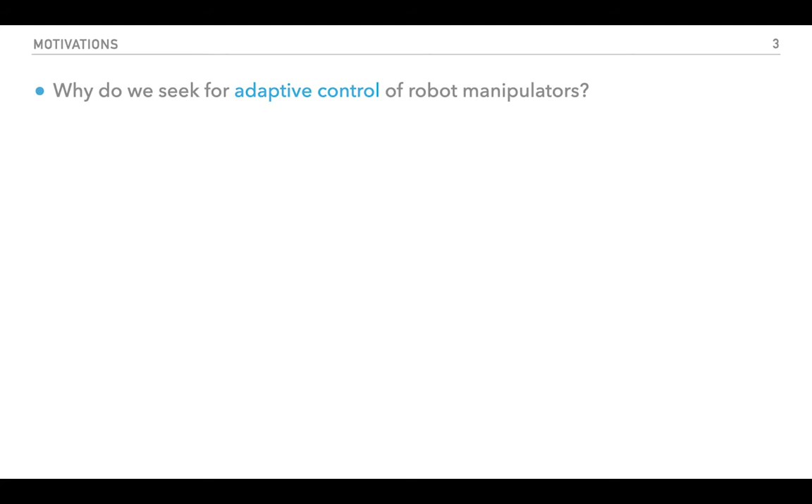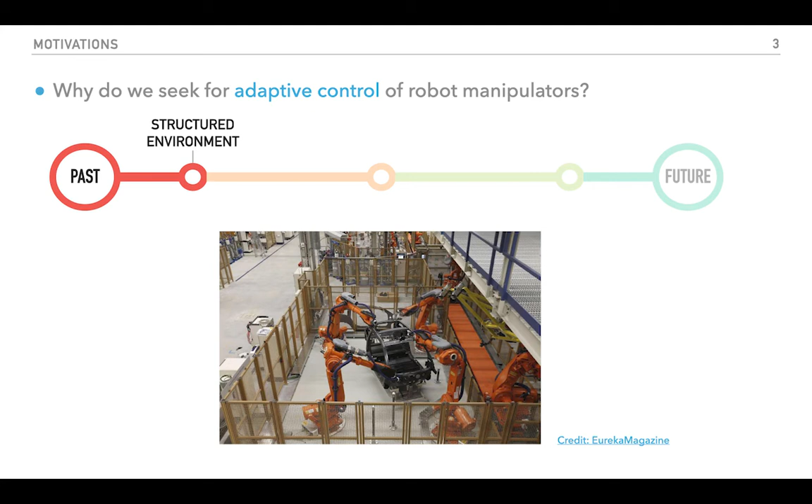First of all, why do we seek adaptive controllers for robot manipulators in the first place? The first industrial manipulators were used in pretty structured and safe environments, surrounded by big fences. The robots had to perform always the same task with very little variations and were provided with an accurate model for control. In recent approaches, robot manipulators are being applied in more dynamic environments.

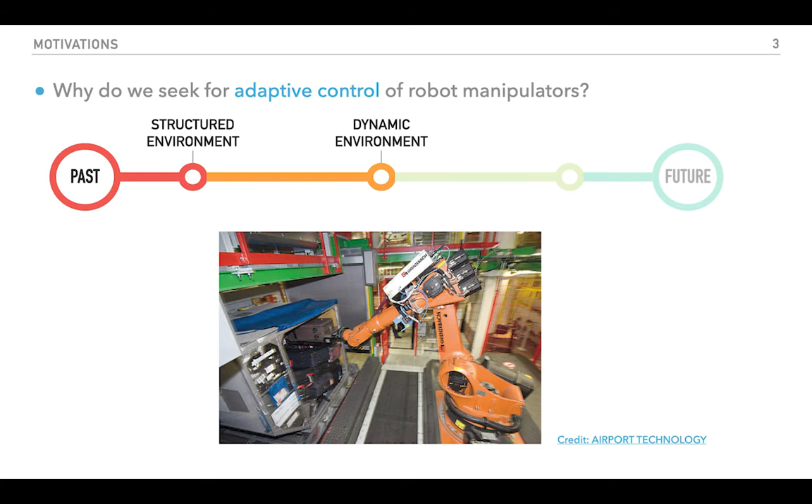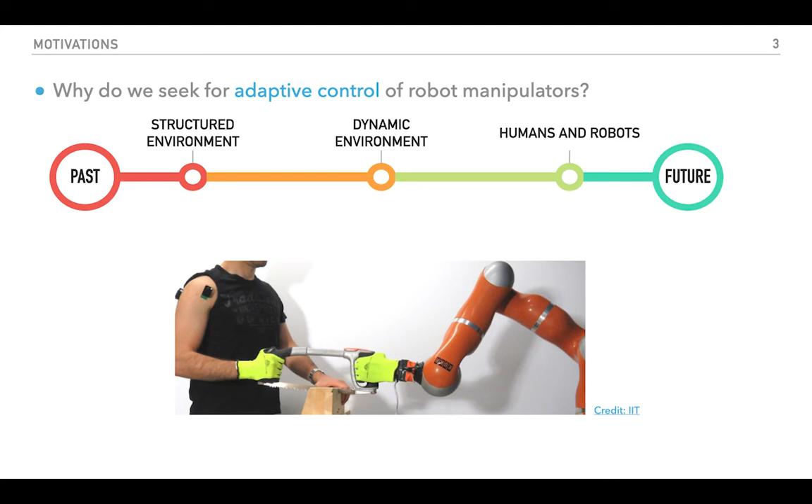Here, the work cell has to be flexible enough to handle different packages which can have different shapes, weights, etc. More cutting-edge and future applications are trying to increment the cooperation between humans and robots, which are now sharing the same workspace. And as you can imagine, in situations like these, we cannot provide anymore an accurate model for control. Thus, we need controllers that can adapt to large uncertainties.

Thinking about the manipulation task from the perspective of a human, you can realize that we rarely have an accurate model of what we're handling, yet we can achieve amazing motions.

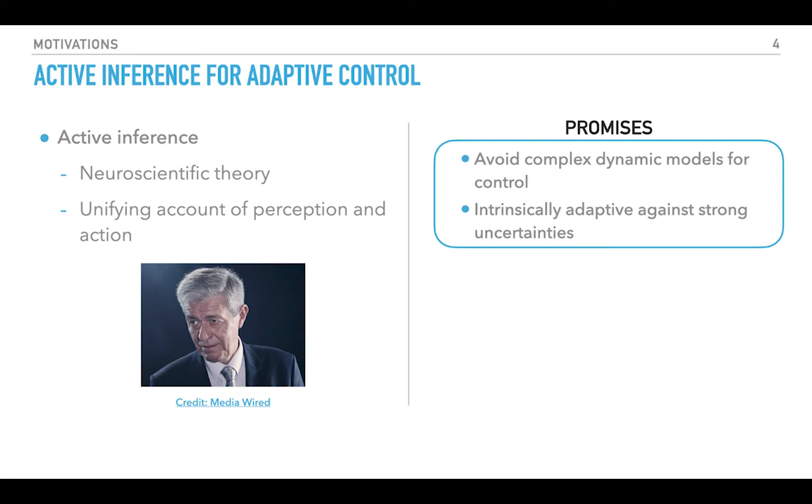In our work, we took inspiration from a neuroscientific theory proposed by Carl Friston called active inference. This theory tries to explain how our brain might function in terms of both perception and actions, capturing the adaptability skills of humans. The promises are that we can derive a control scheme which avoids the use of accurate models and which is also adaptive against large uncertainties.

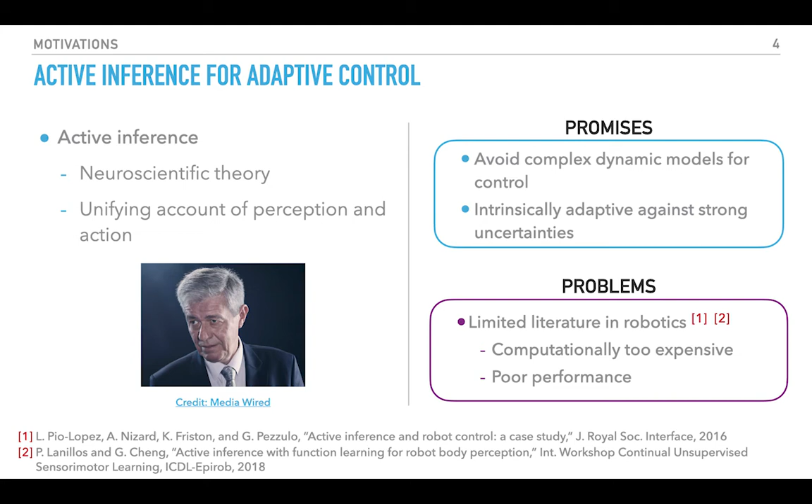However, when we started this study, the published work on active inference for robotics was really limited. The main problems of past solutions were that active inference was too computationally expensive and had poor performance. But we will see how with our work we overcame these limitations.

Since active inference is a fairly new concept in the field of robotics, I'm going to describe its working principle to have a common ground and understanding.

Let us assume that we have a real process that we want to control, let's say a robot arm. This robot arm can be represented by a number of states, x.

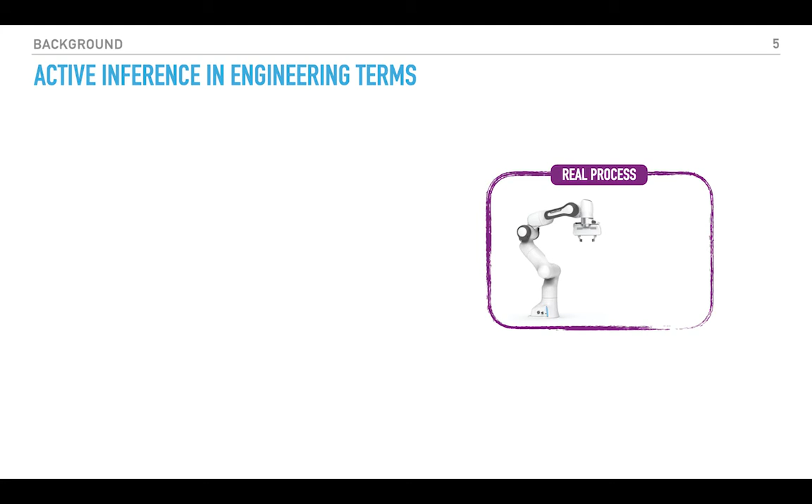To control the robot, we have of course our active inference controller, which can sense some noisy quantities from the real process through the sensor input. The controller also represents the real process with a pretty rough model. In particular, it has an internal representation, so an internal belief mu, about the real states x.

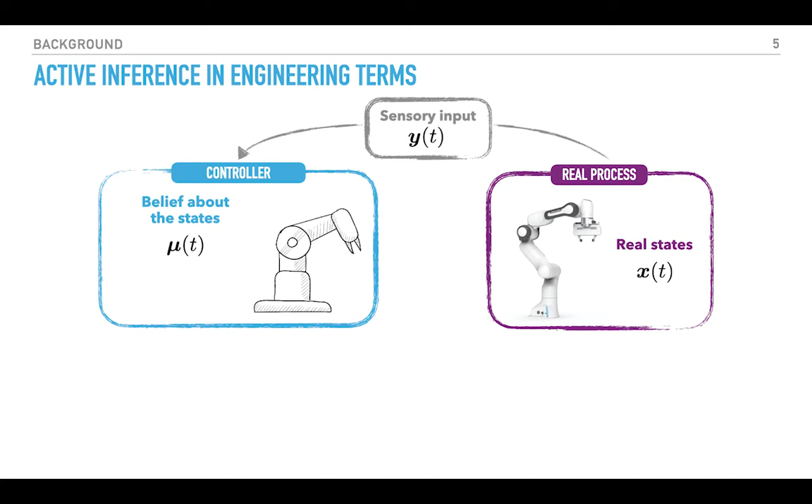The controller also encodes two generative models. In particular, the first one, g, explains the relation between y and mu, and the second one, f, represents the belief about the evolution of the states.

Furthermore, the controller can apply some control actions to the robot arm, torques for example. Doing so, it can change the sensor input in order to match a desired sensation. As a recap, the controller uses the sensor input together with G and F to refine its internal beliefs, and the controller uses actions to match a specific desired sensor input.

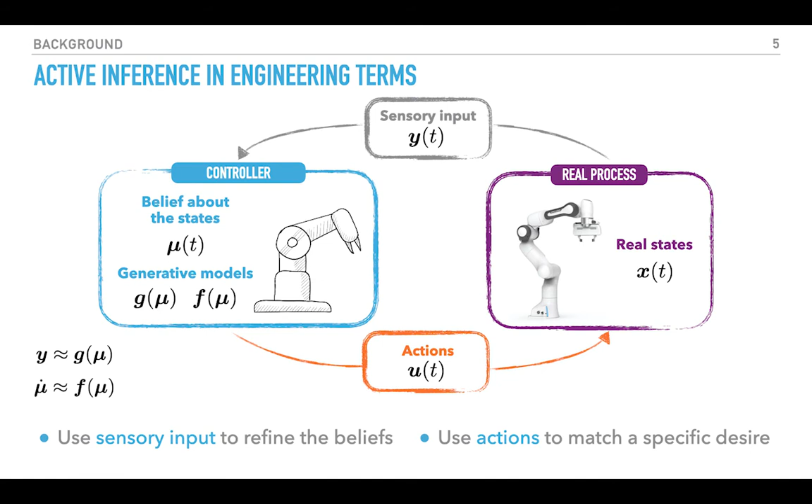Going a bit more in detail, how do we update the beliefs and how do we compute the control actions? Well, the belief update and the control actions are computed through the minimization of one single function, the so-called free energy, using a gradient descent.

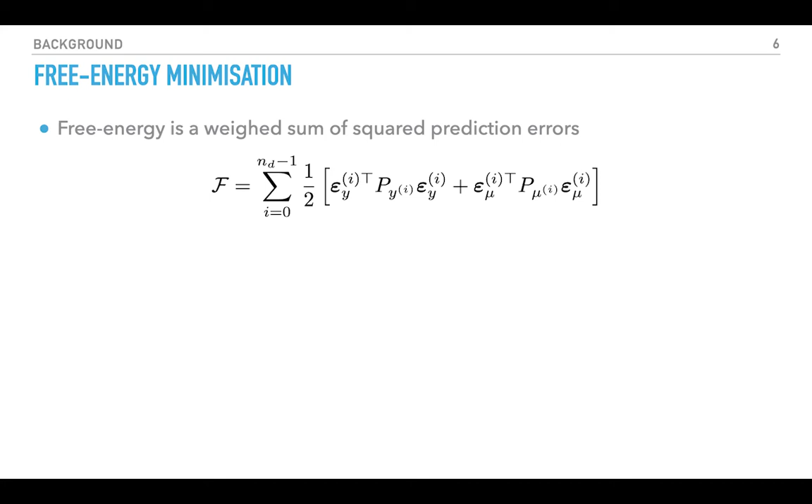The controller can suppress the free energy by changing the two things it depends on. It can change its internal beliefs about the external states, so performing filtering and state estimation, or it can change sensor input by acting on the environment, using the control actions.

So to be able to compute the beliefs and actions updates, we have to specify the relation between the states and sensor input, so G, but also the expected evolution of the states, F, and the effects of the control actions on the sensor input.

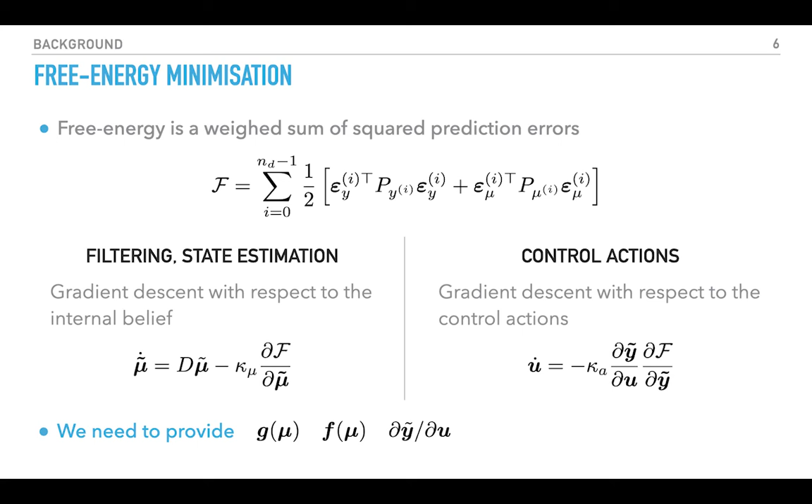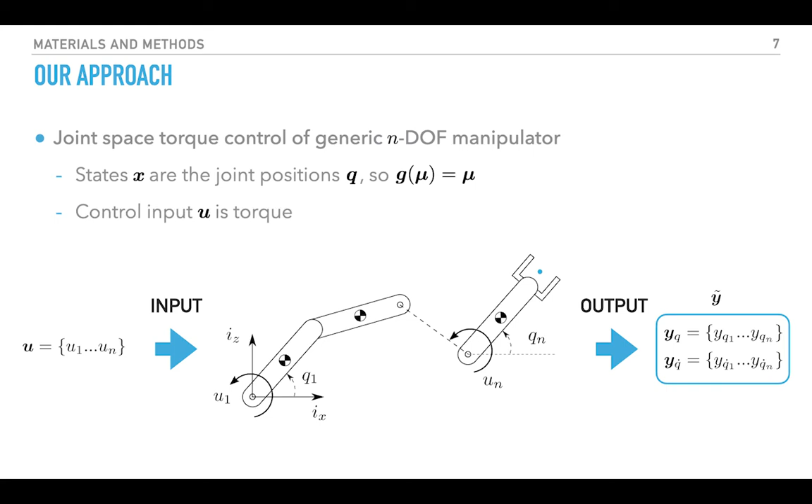In our work, we formulate the first active inference controller for online closed-loop joint space control of industrial robots using torque commands. We impose the states to be controlled as the joint positions, so G of mu is simply mu. Also, we use low-level torque commands for each joint.

To define our active inference controller, we had to make several design choices to define the expected evolution of the states, F, and the effects of actions into the sensor input. But the key point here was really to keep it simple. So instead of modeling the true dynamics through F, we impose that the states should evolve as a first-order linear system which converges to a desired value mu d.

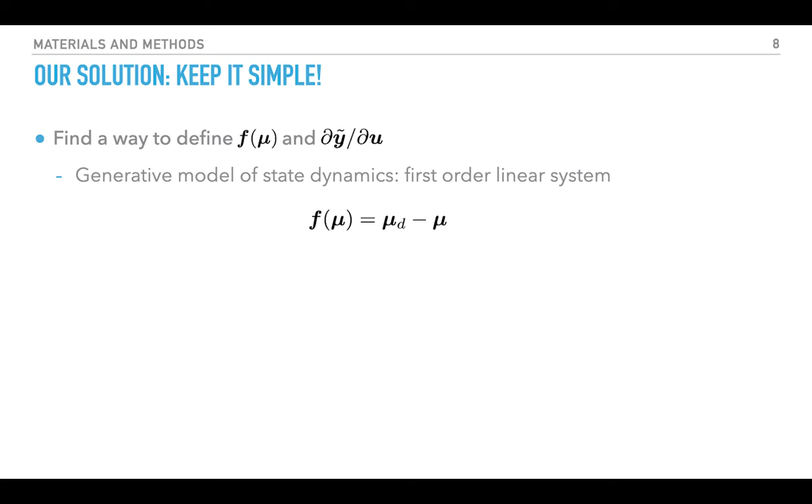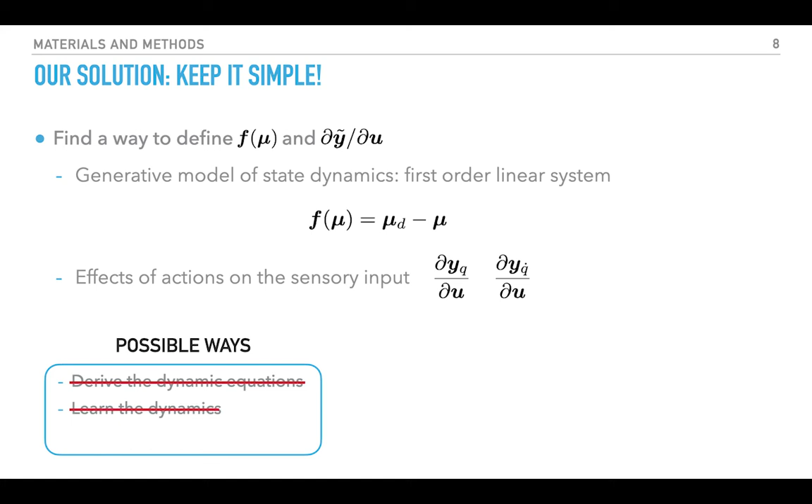To compute the control actions, we have to specify the two partial derivatives which represent the effect of a torque on measured position and velocity. Possible ways of doing so are deriving the dynamic equations, but this would defeat the purpose of our study, or we could learn the dynamics, but as we saw in past work, this requires a lot of data and can produce unreliable results. Finally, we could approximate the dynamics, relying on the high adaptability of active inference. This was the way we chose to pursue.

The approximation we introduced was to only encode the sign of the full time-varying relation. This means basically that a positive torque leads to a positive acceleration. Using active inference, we then derived a model-free control law where instead of modeling the true and nonlinear dynamical process, we define a reference model that active inference has to follow.

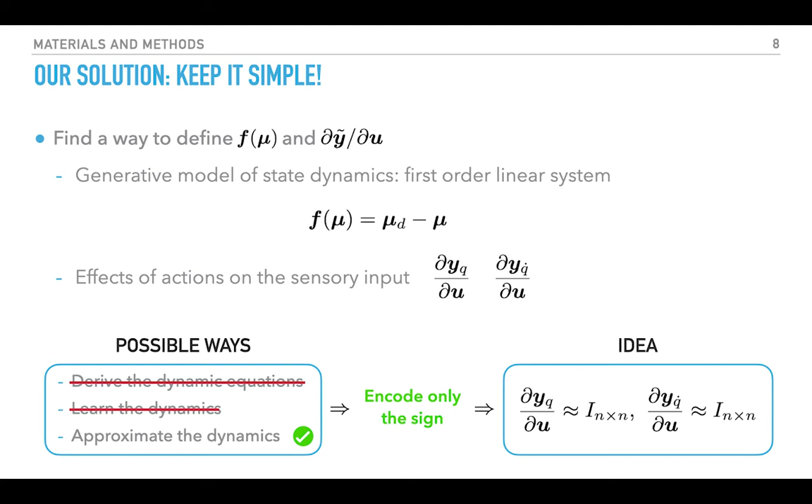To evaluate the performance of our active inference scheme, we chose a model reference adaptive controller as benchmark, due to its similar characteristics. In particular, also the MRAC does not require a dynamical model of the plant to be controlled.

For the tests, we use a Franka Emika Panda 7 degrees of freedom robot arm. Basically, the active inference and MRAC are tuned in simulation using a heavily approximated model, with fairly wrong link masses and inertias. Then, the controllers are directly applied to the real robot to appreciate their adaptive properties.

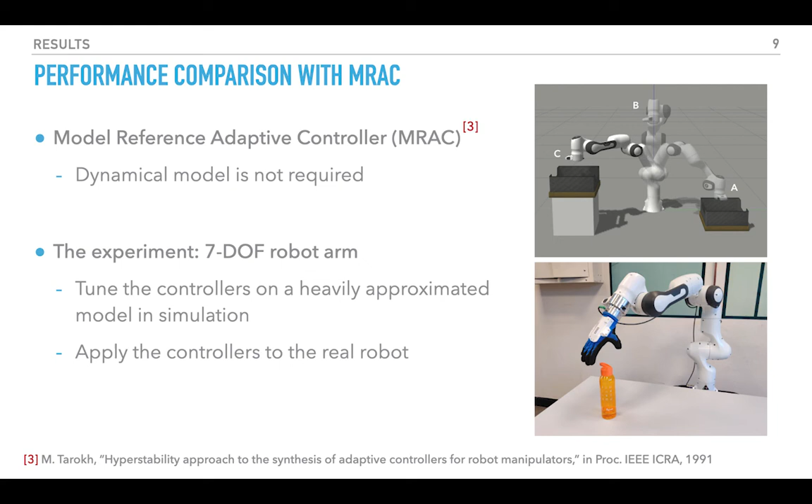First of all, we would like to point out that the active inference controller could be transferred from simulation to real robot without retuning, while MRAC causes a safety stop. We can see, however, some oscillations for the second last joint of the robot, but these are, at the end, damping down.

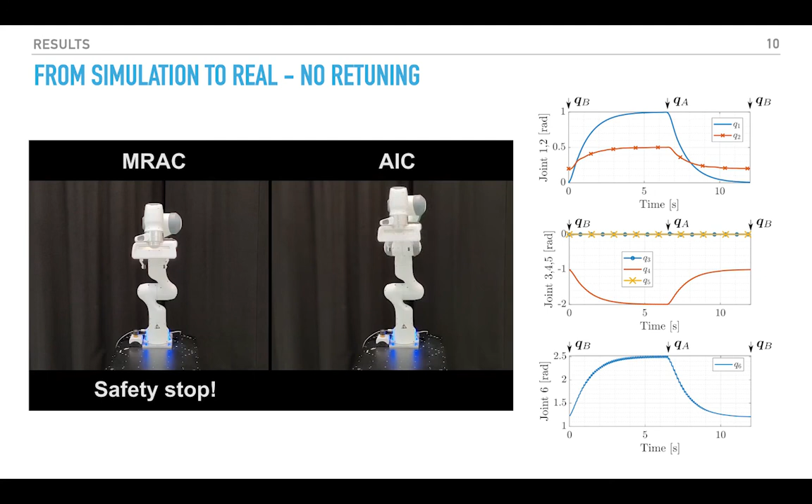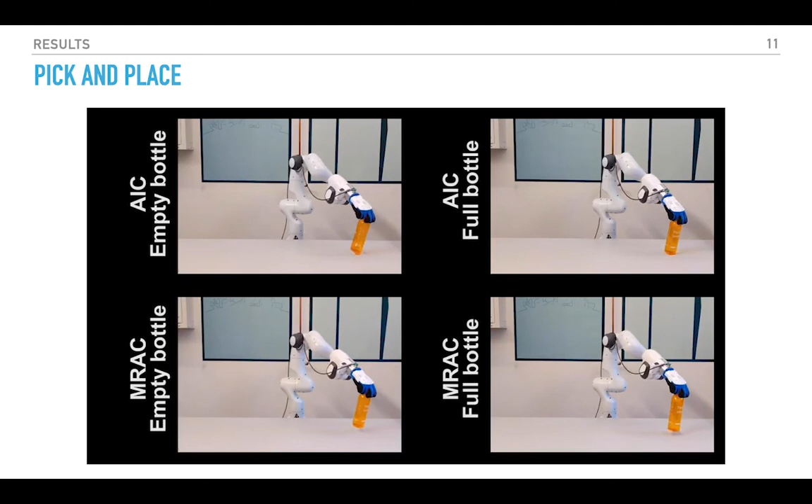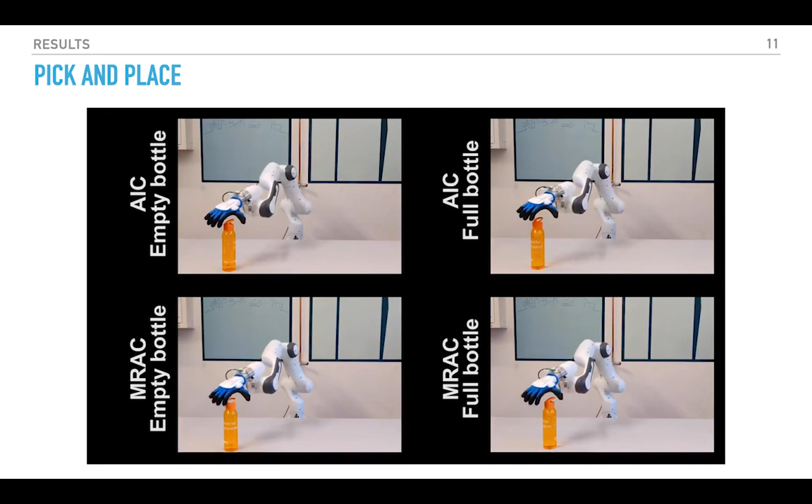After retuning on the real robot, we use both controllers in a pick-and-place scenario in case of an empty and a full bottle of water. In general, we can see that the active inference controller has a smoother response, which causes less oscillations in the handled object. And this can also be appreciated looking at one cycle in joint space, where the active inference controller achieves the set point in both a faster and a smoother manner.

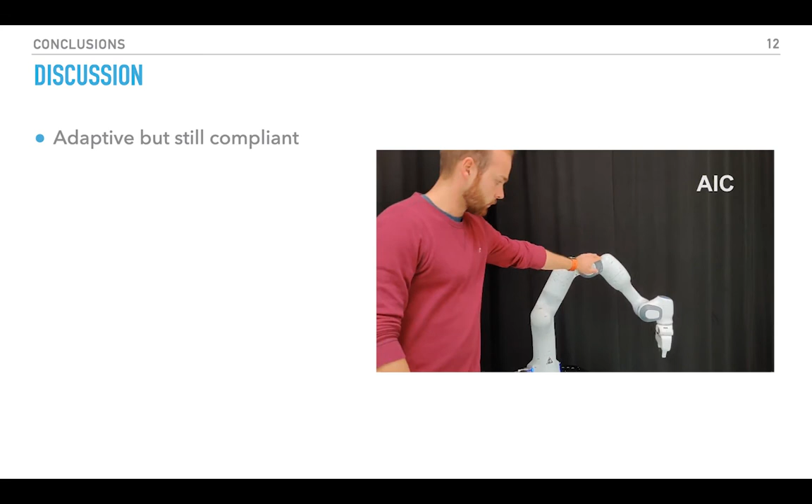And this brings us to the discussion section. The active inference controller resulted in a very adaptive and yet compliant robot, which is also easier to tune, having less tuning parameters. In fact, the active inference controller has only 6 compared to the 119 of the MRAC.

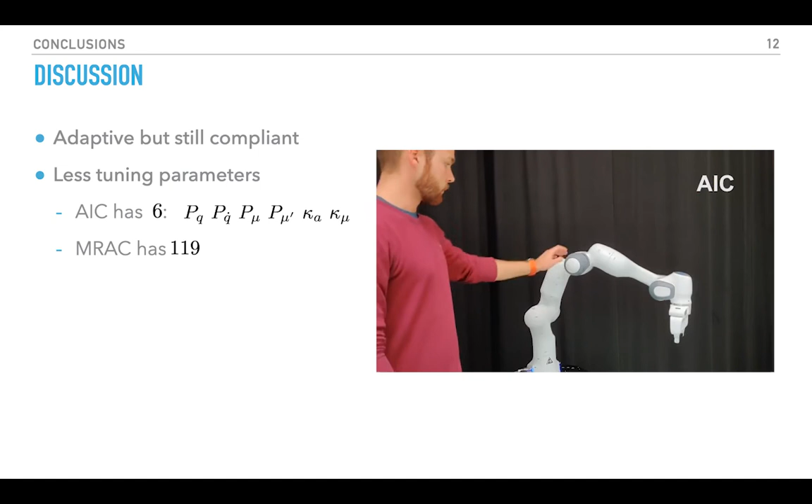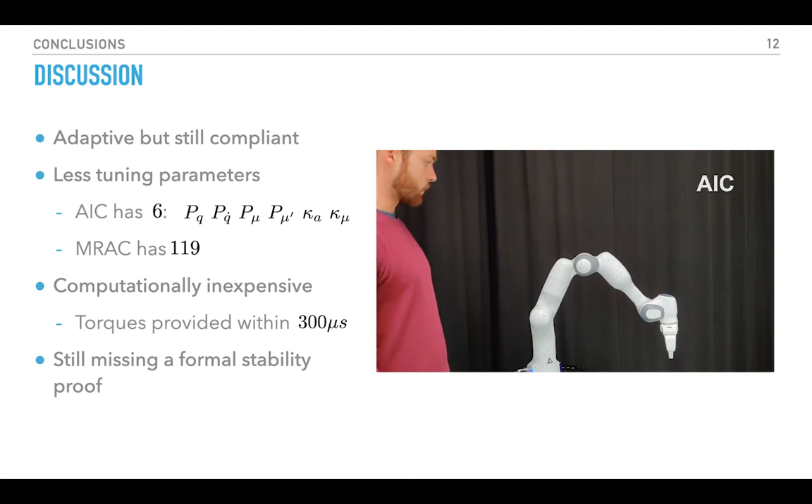Besides, the control scheme is computationally inexpensive. We were able to provide the control torques within a hard real-time constraint of 300 microseconds using just a standard laptop. However, a formal stability proof for the algorithm is still missing.

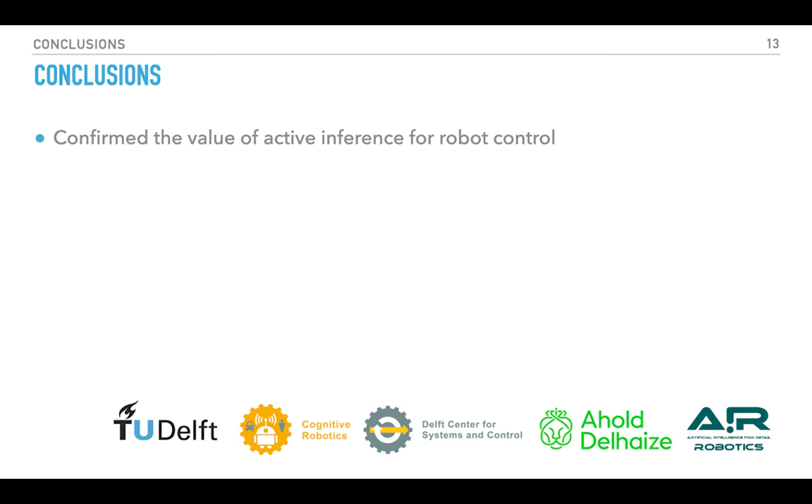To conclude, the main contributions of this work and take-home concepts are that, first of all, we confirm the value of active inference for adaptive control, providing experimental evidence. Doing so, we derived the first active inference scheme for online closed-loop torque control of robot manipulators.

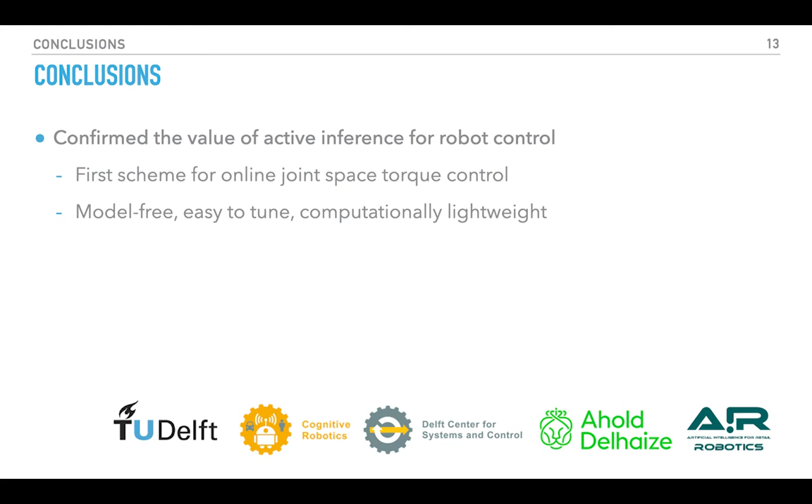This scheme is model-free, easy to tune, and computationally lightweight. Besides, its adaptive properties allow it also to transfer from simulation to real setup without retuning. In all the tests we did, we outperformed the benchmark MRAC.

However, as we told you before, even if we have strong evidence of stability of our active inference controller, a formal mathematical proof is still missing and will be part of future work.